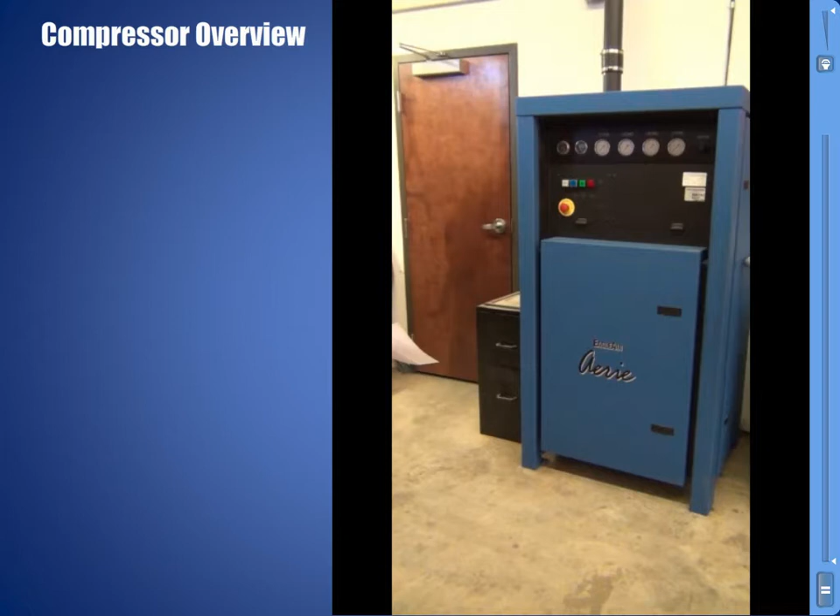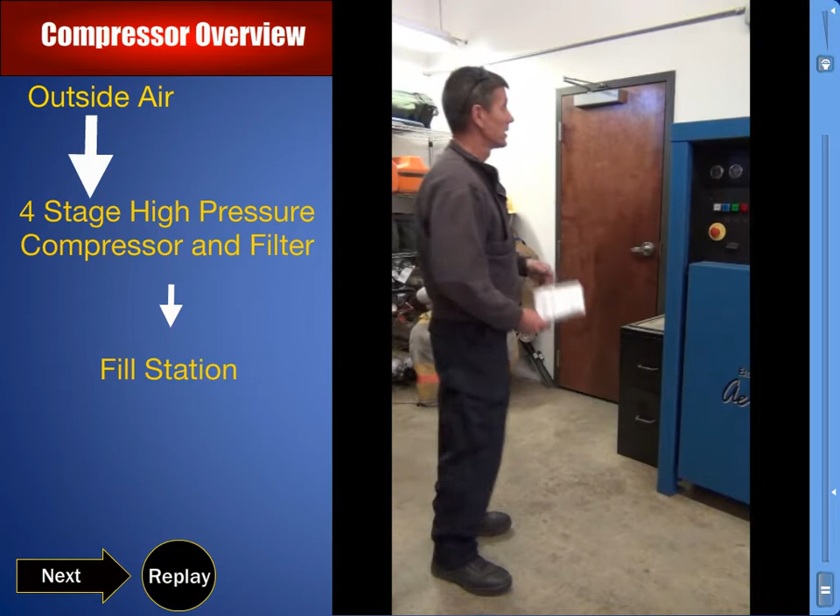Basically, this is our breathing air compressor. It takes regular outside air, purifies it through filters, and then compresses it into our storage cylinders. We have an outside air intake, so we get clean air that runs through filters, compresses, and is used to fill the SCBAs.

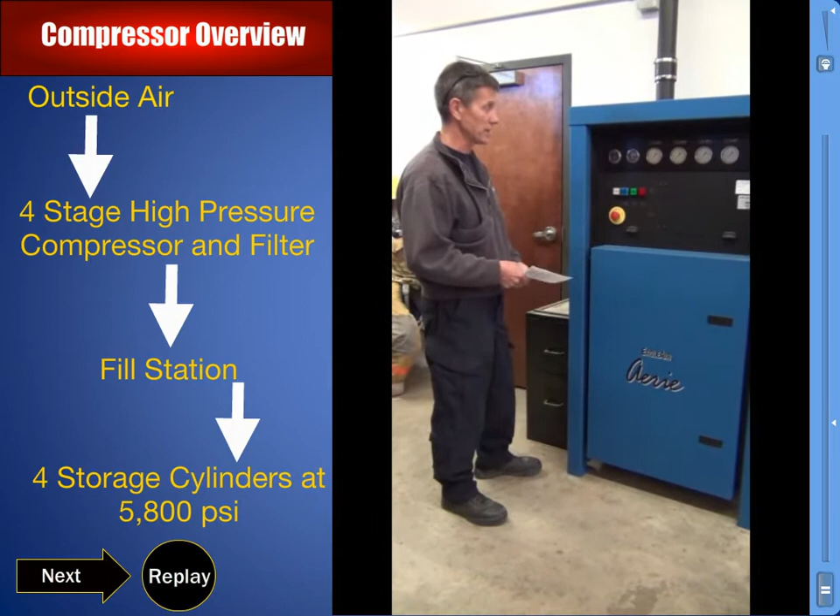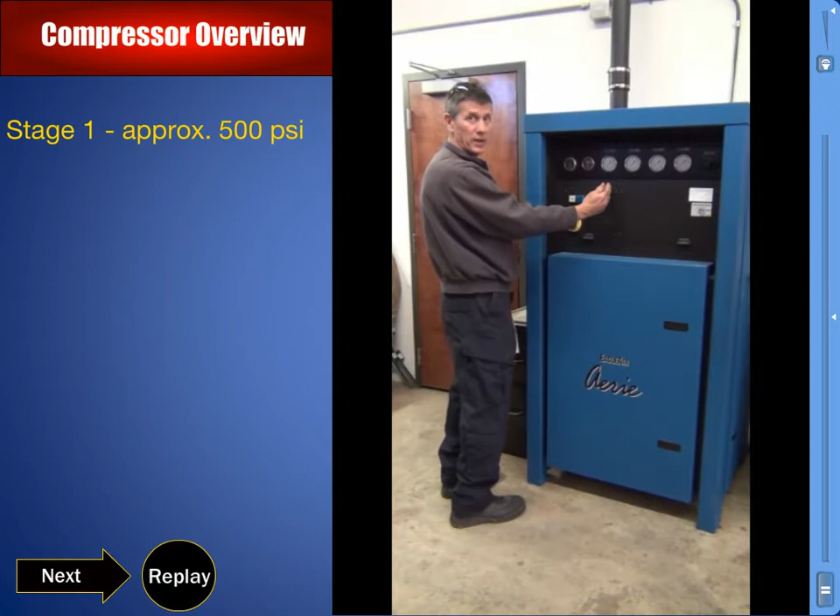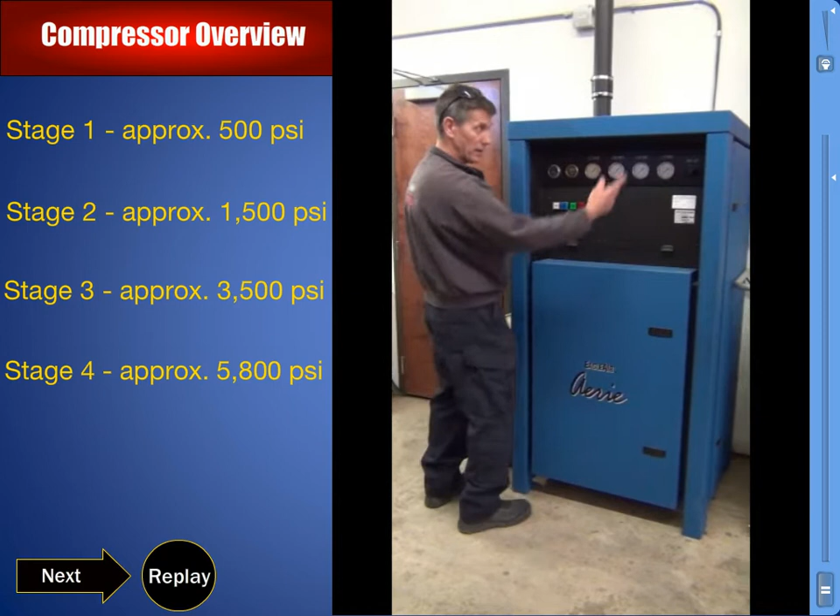As the compressor is running, you'll watch the first stage build up to its pressure output, then gradually all the other stages follow. The first stage would be on the order of 500 psi. Second stage would bump that up to 1500 psi. Third stage would pump that up to 3500, and the fourth stage is the high pressure piston, which does the final compression up to, in our case, 5800 psi. It goes from the outlet valve through the fill station and into the cylinders.

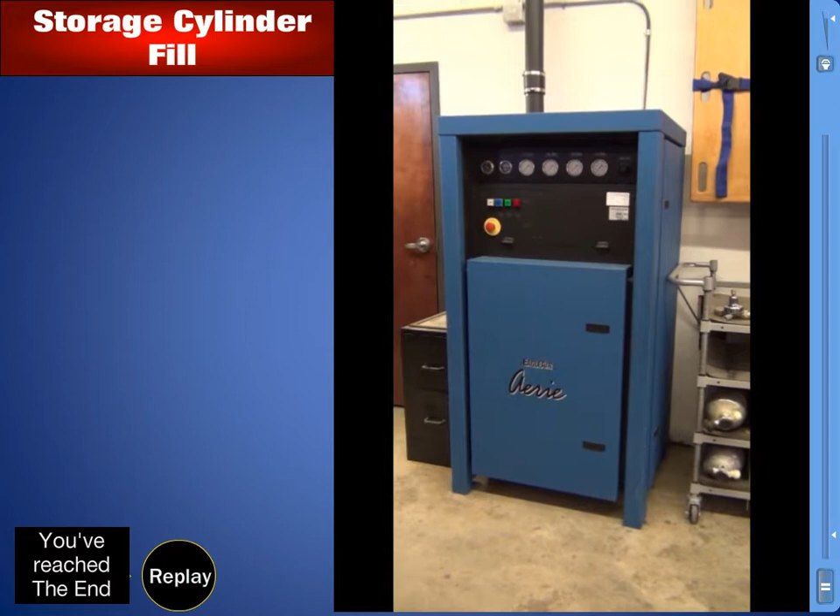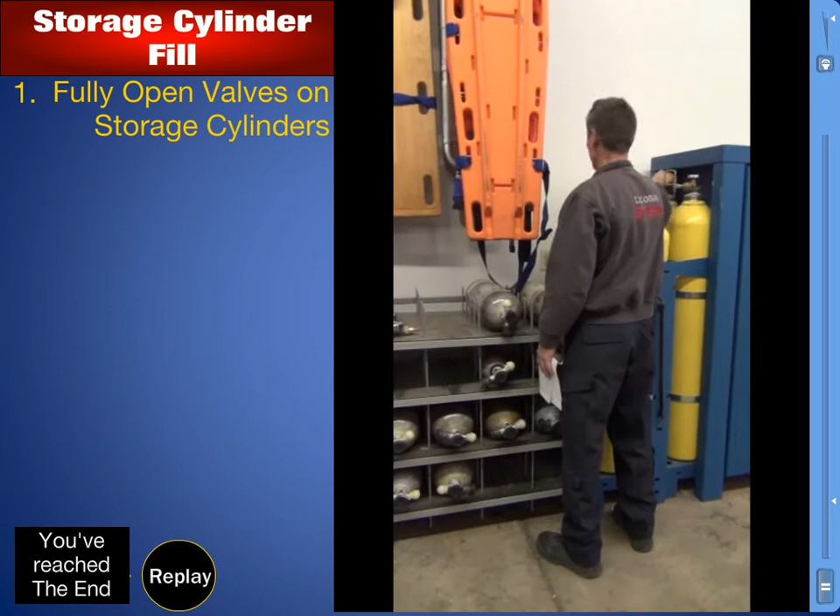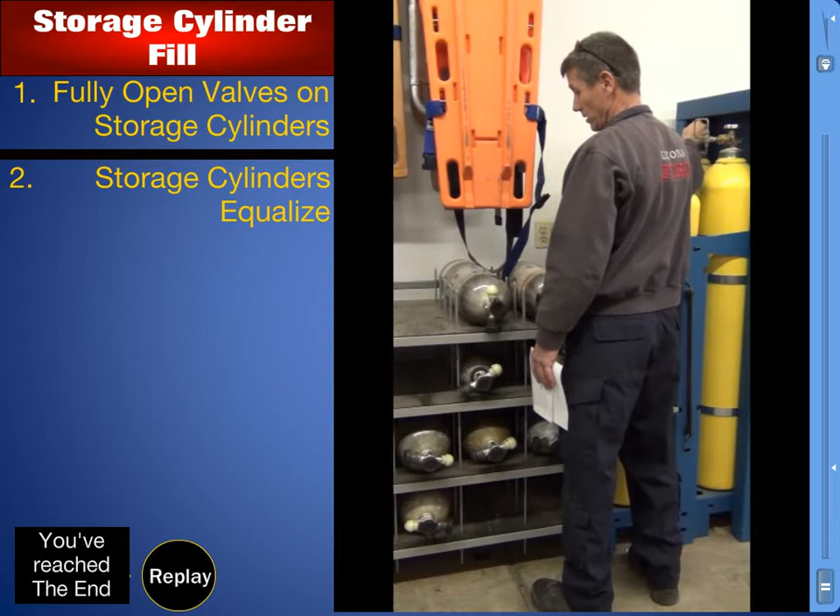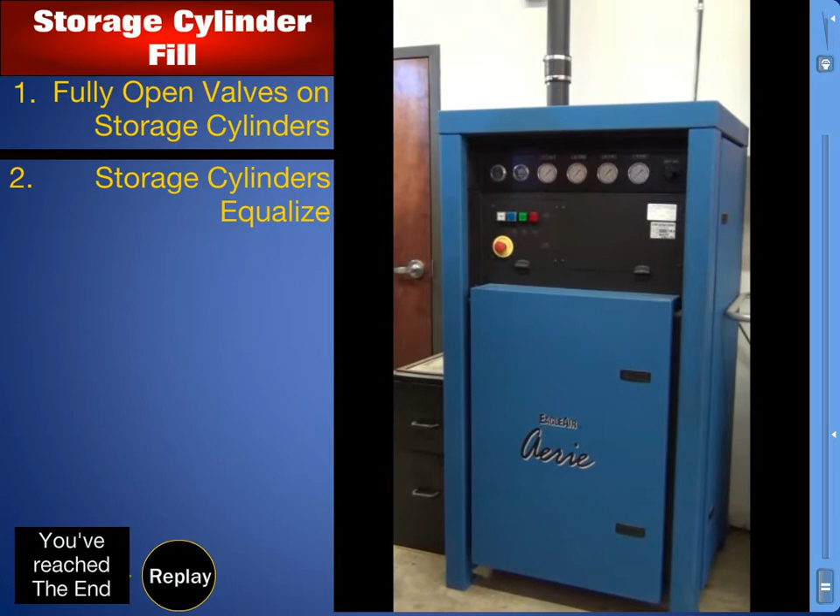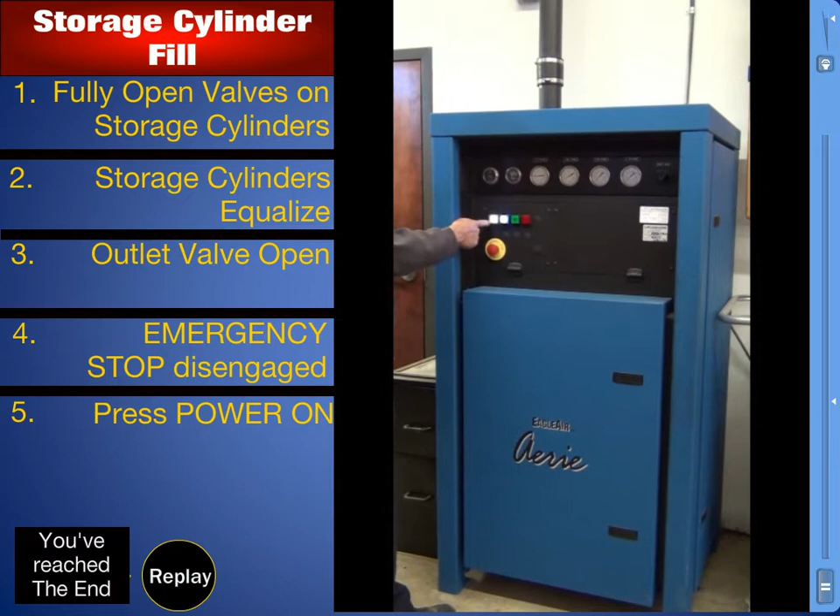We're going to come back over to the machine. We should have already checked this out on the pre-use checks, but we're going to verify that the outlet valve is open and the emergency stop is out. Very simple: press the power on button, it'll depress, and the light will illuminate.

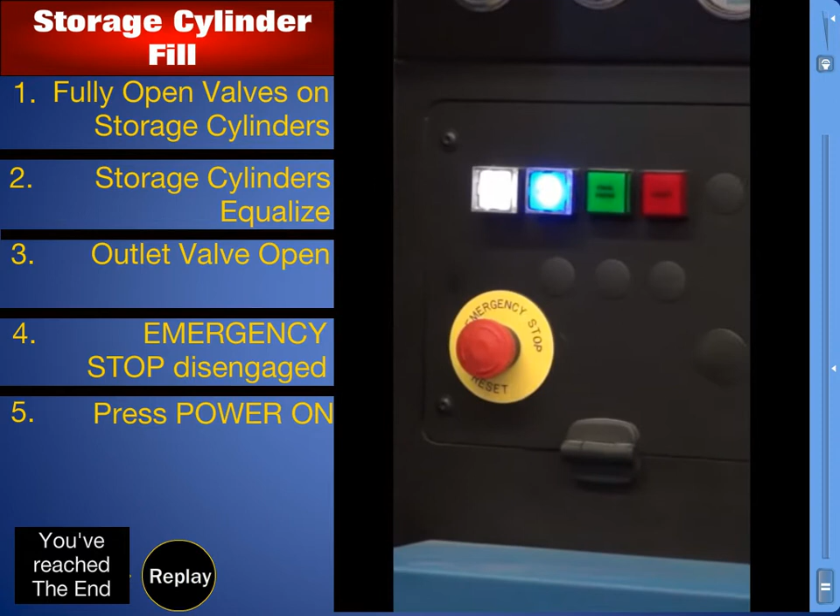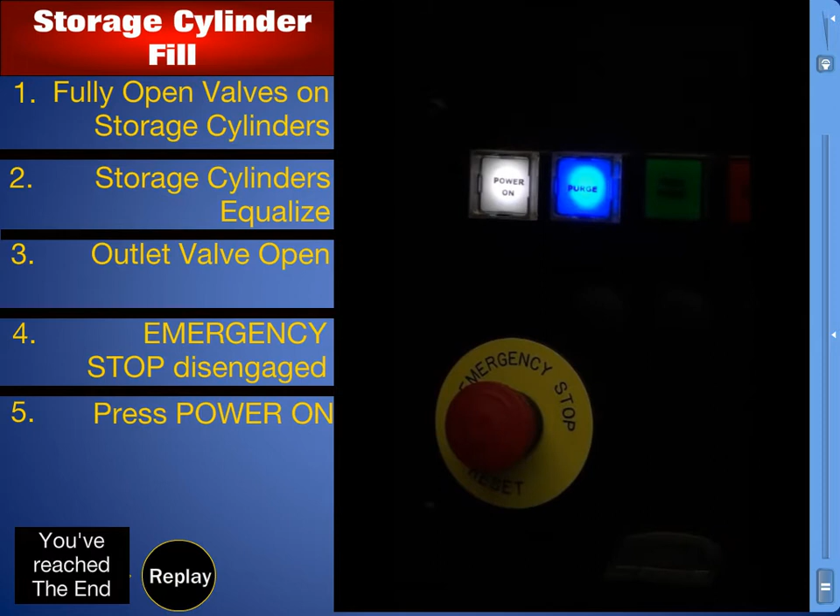One thing to note, it'll take quite a while for the cylinder to fill up. At this point, you can go away while the compressor works up the pressure and eventually fills the bottle.

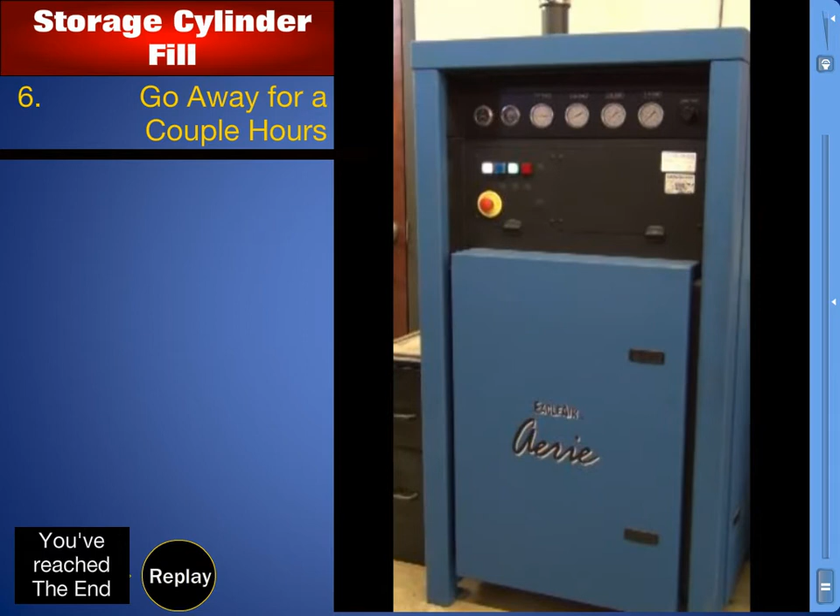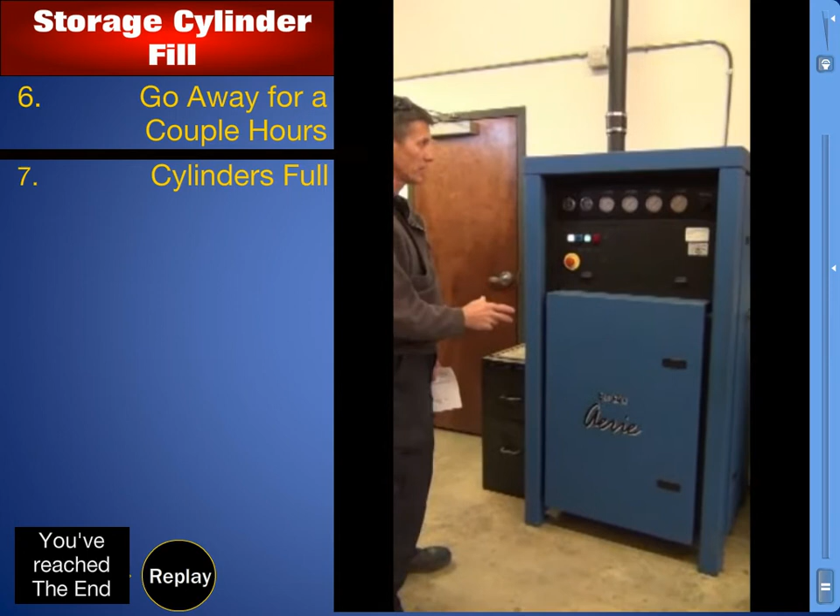Alright, so now after a couple hours of running, this is when the storage cylinders have been filled. This is what you'll see out on the panel. You'll see a final pressure light, knowing that all the bottles are pressurized to the regulated 5800 psi.

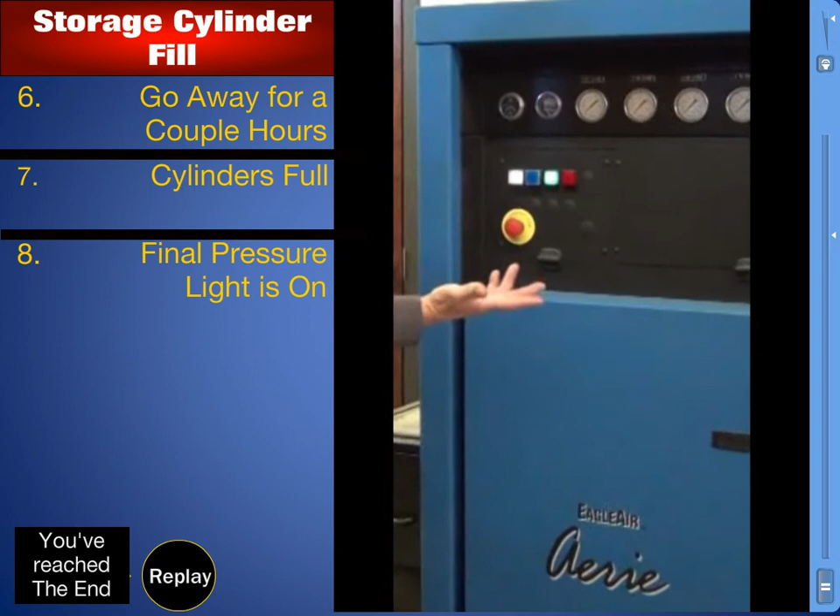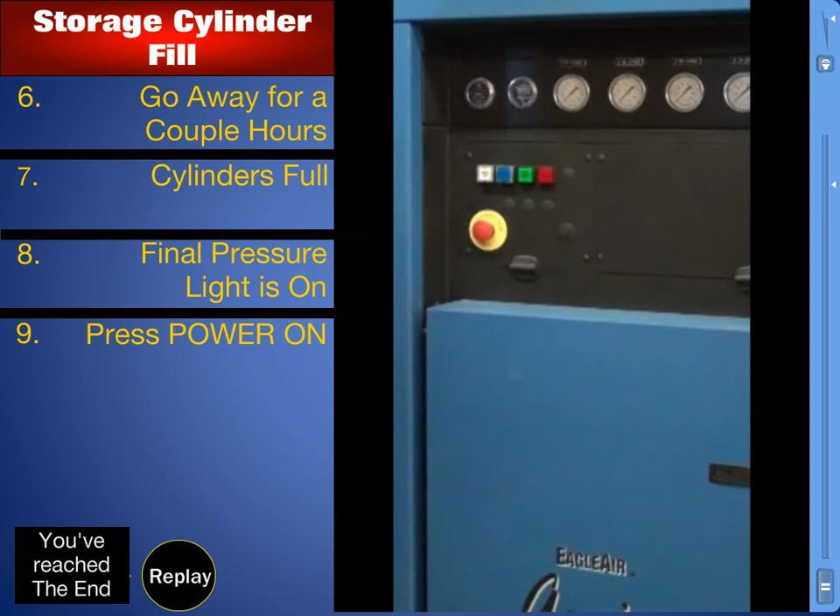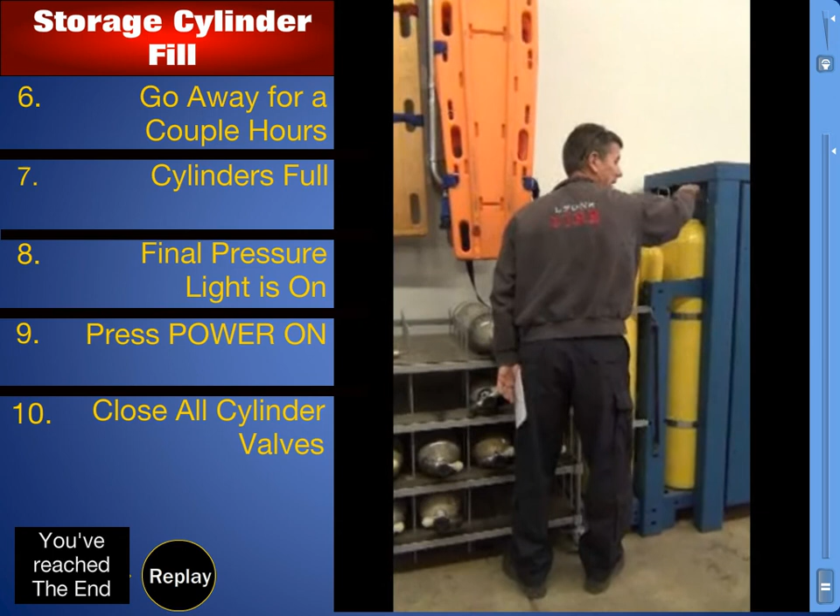So now all you have to do to shut down the system, until you run the whole process all over again, is press the power on button. It'll come out again, flush to the cover, and the light will go out. Then the final step is, whatever bottles you are filling, make sure the valves are all closed again, lightly against the seat, and it's ready for the next use.